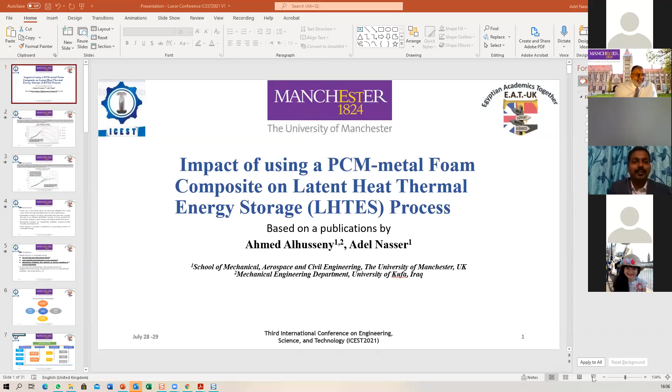He's from the Department of Mechanical, Aerospace, Civil Engineering, Faculty of Science and Engineering, University of Manchester, UK. He's ready to share his experience and impact of using PCM metal foam composites on latent heat thermal energy storage process. A small gist about him: mechanical engineering graduate from the Faculty of Engineering, University of El Fatih, Libya, followed by an MSc in computational methods and fluid mechanics from the Aeronautical and Mechanical Engineering Department, University of Salford. Then he joined the Thermo and Fluid Divisions of Mechanical Engineering Department at UMIST as a researcher, then went back to Salford University for 5 years to work on a number of projects. He has done so many research projects, flourishing for more than 19 years. University of Manchester has the privilege to have him in this position. With that small intro, I would like to invite our speaker to share his experience with the audience.

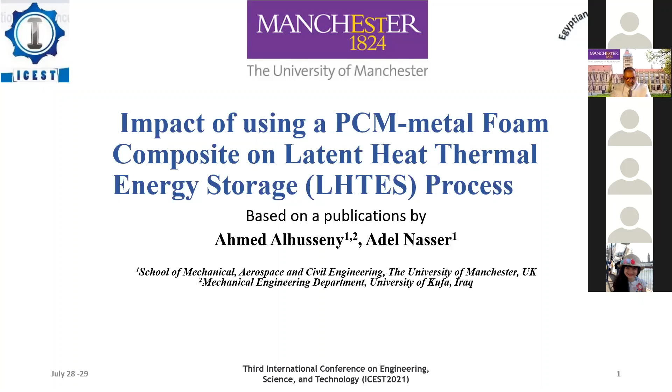What we're going to talk about today is the use of green energy, moving from fossil fuel to green energy, and the problems that we have with the use of green energy. Recently, PCM, phase changing material, became one of the topics that many people use to enhance the effectiveness of green energy.

The reason for this is this picture, which is a very old picture, but it depicts how much carbon dioxide will be generated for different increases in temperature around us. This is what we're talking about, the greenhouse gas and its impact on our life and our world. Many of us can see these days floods and rains, all these things.

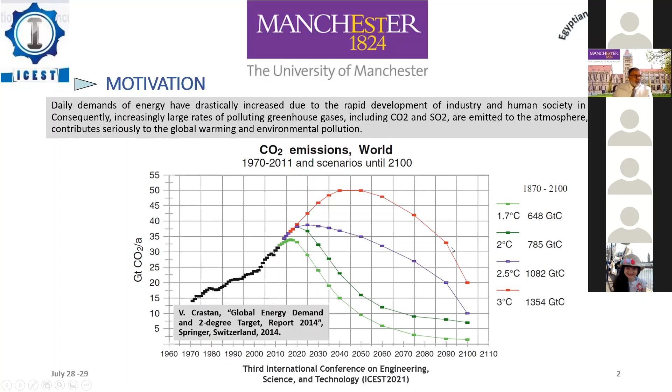From here is the current situation, and these are the various predictions of how bad it's going to go in terms of the amount of carbon dioxide that will be produced if we don't do something about it.

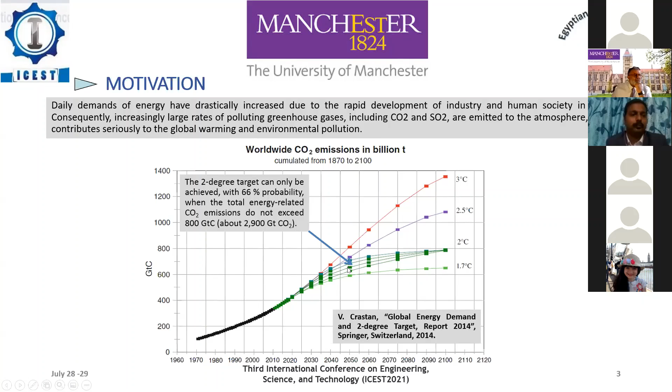The other part of this, everybody knows that the nations of the world came together and decided carbon dioxide should not push temperatures above 2 degrees centigrade, to save our world. So this is the range we are targeting, and we're going to do this by reducing our carbon dioxide. This is why we are moving from fossil fuel energy to renewable energy.

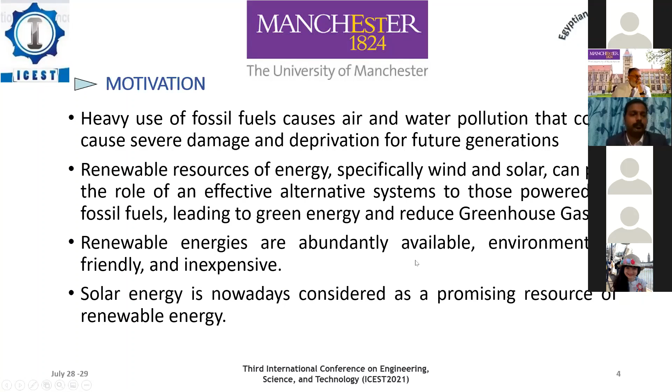One of the good things about renewable energy is that it's available and free, and environmentally friendly as well. Most people these days use wind energy, like Sharwan has done in his presentation, and solar energy is another popular renewable energy.

But the problem with them is that the temperature during the day is varying, and during the night there is no sun at all, so there is no energy we can use. It is intermittent as well as variable. But the need for electricity is not going up and down, it is always increasing. So the discrepancy between the amount of energy supplied and the energy demand is imbalanced.

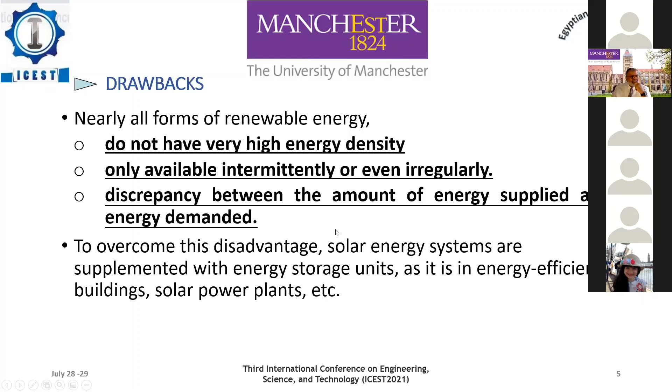This is where many people see storing the spare energy, when we have a lot of it, as a good way forward, so we can use it when we need it. So, energy storage technology - this assembled picture is what we are focusing on. Obviously there are other ways, but energy storage at the moment can be mechanical, electrochemical, chemical, or thermal energy. We will be focusing on thermal energy.

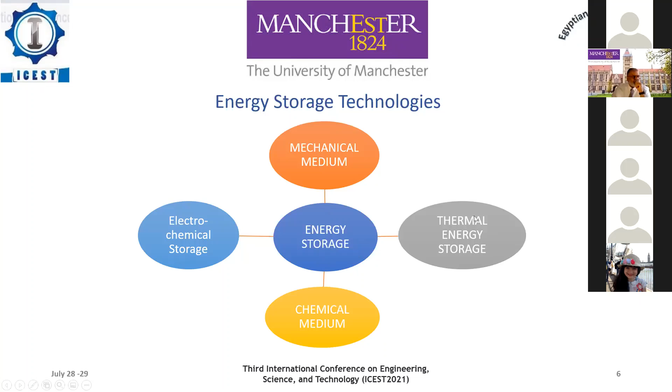Electrochemical is basically when we are talking about batteries, okay? Mechanical is when we are talking about the flywheel and the hydro energy, the pumped hydro energy.

In chemical energy, we're going to talk about a lot of chemical components that can be broken down into small components using heat, saved separately, then brought together when we need the energy. This is where most of our work in our group is in this area. We did some work on hydrogen, but this is the one we normally use, especially the latent heat. This technique is sensible heat storage, latent heat, or thermochemical.

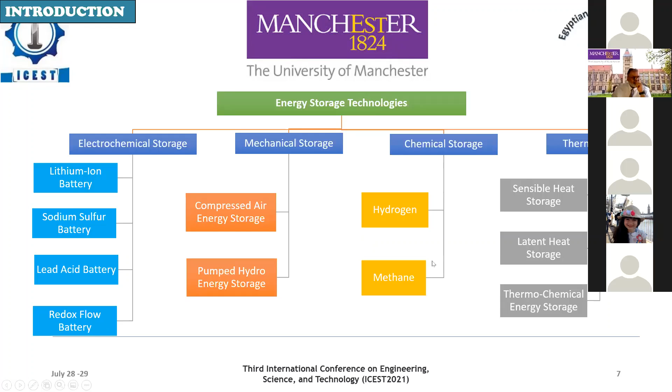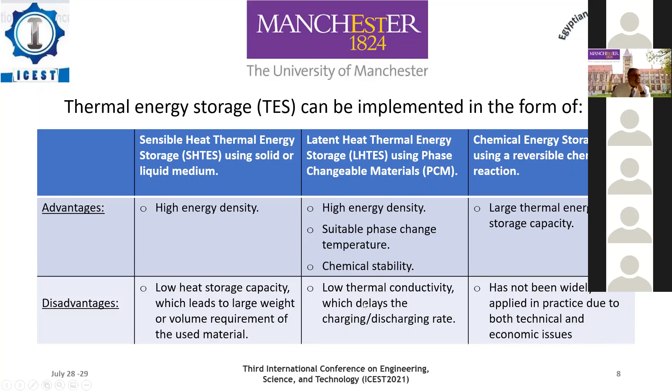And we'll cover this metal foam with paraffin, which is the phase changing material. This is something Dr. Ahmed and Rakim found out of the literature survey. Yes, Rakim Al-Sabar. Rakim, please mute your mic.

It is disturbing others, Rakim. Yes, Professor, please proceed, sorry.

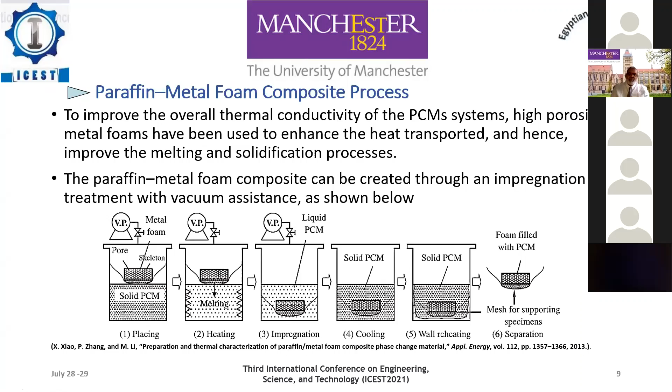Thank you, Dr. Adel. So here, if we have this sponge metal, we warm or heat this PCM material and it becomes like liquid down through the structure, the sponge or metal foam in it, and leave it there to cool. When you bring it up, the paraffin itself covers all the structure of the foam. This combination between PCM and metal foam is a kind of storing media that we're going to use to enhance our thermal energy storage.

So the foams, this is how they look. There are two examples here: a nickel one with different pore densities. Here we have 5 holes or pores per inch, here we have 10, here we have 25.

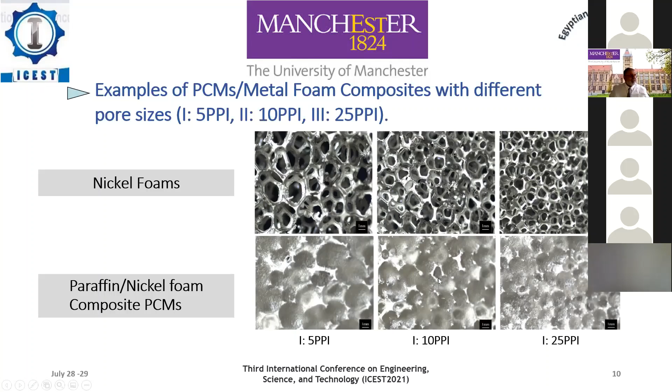So even with that, there is a variety of structures we can use, and each one will have a different capacity for heat. If we use this with the paraffin, this is a kind of PCM material we'll be able to use in practice. I have another example, which is copper, again with different sizes, and we cover it with paraffin.

Now we're going to use one of those to explain the advantage of what we just did, the advantage of mixing PCM material and metal foam. I think that was one of the very early papers that Dr. Ahmed produced. What was our test study or case study?

We have a tank, or rectangular container. Inside it, we filled it up with the PCM metal foam we just created. We cover this around it by a layer of metal foam, a different one, but that doesn't matter. Then we have a channel where the water goes in from this side, goes around here, and comes out from the other side. So this is basically the problem that we were trying to solve.

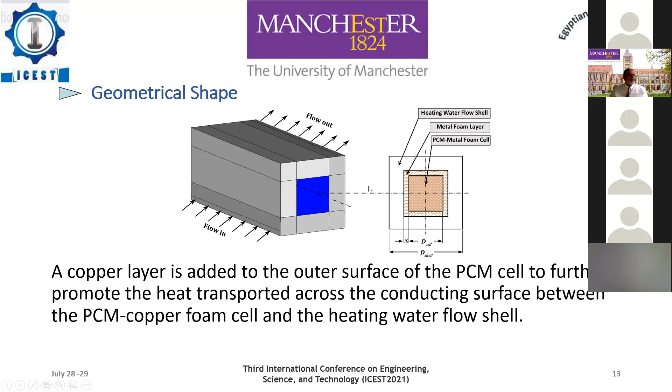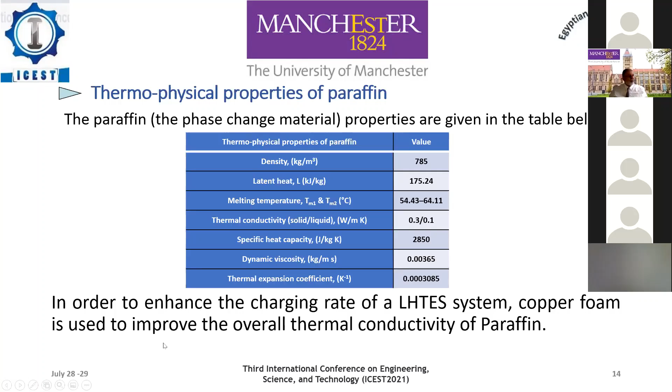These are the properties which come with the paraffin, okay? And in order to enhance the rate of charge of our system, copper foam is used to improve the thermal conductivity, as I just said. What's happening with the questions?

Don't show me up. Okay.

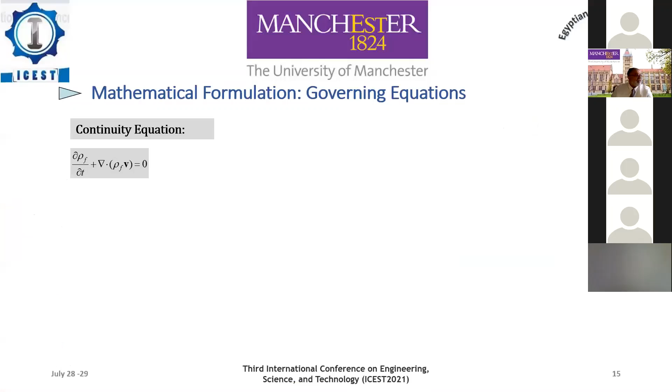I think the animation is not working in this, but it doesn't matter. I am going to explain. Anybody who is an engineer will know what a governing equation is.

As Dr. Sharwan just said, we have the continuity equation and the momentum equation. In this equation, we have a few new terms that appear which represent the inclusion of the phase changing material. There is phi here, which represents what we call porosity, and C and K, which is called inertia resistance. Those terms here are the viscous term, as you can see mu here, and this here we call the inertia term.

But those terms I just pointed out, those three terms, are not readily available, and we need to use some empirical formula to be able to calculate them. I will show you some of them. So this is the continuity equation, the momentum equation.

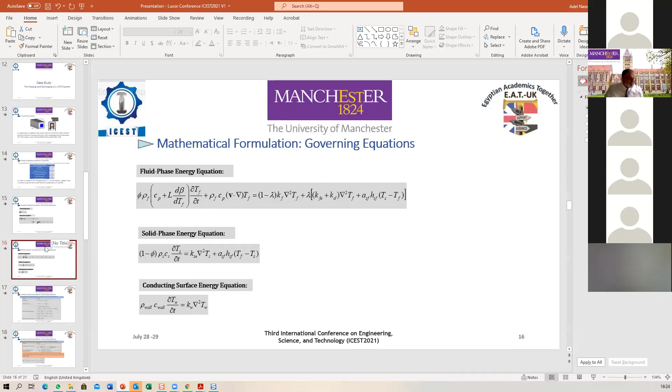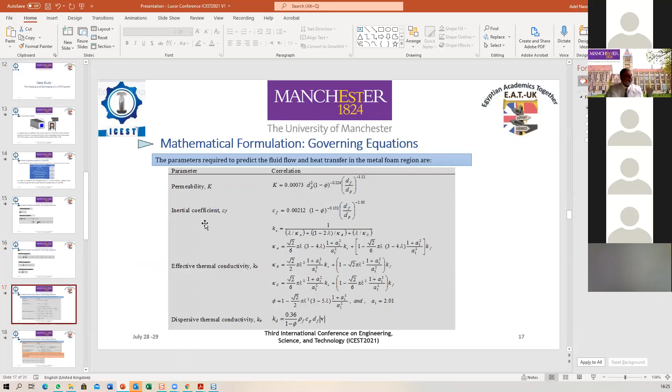So for us to solve those two systems, we need some empirical formulas. I'm not going to give you any headache by going through them, but this is the permeability, the inertial coefficient. And again, if we go here, we have the interfacial specific area. All those values we have actually included in the calculation. One new term to you is what we call liquid fraction or solid fraction, which is the amount of liquid in the combination. We'll talk about that in a few minutes.

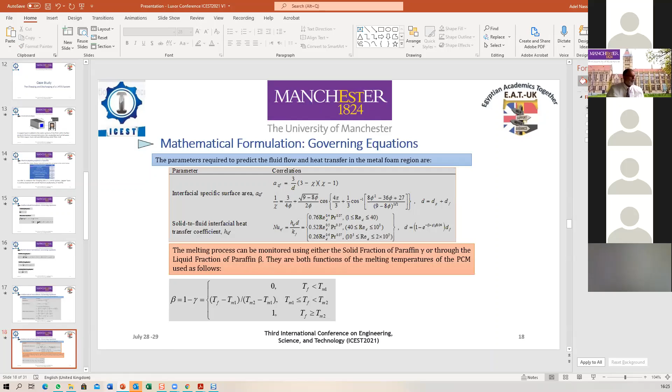So let me see now if it's going to work without a problem. Yes, so for the problem we described or showed you earlier on, we have this boundary condition. The mass flow in for the water is equal to the one coming out, and there is a temperature at the outlet using the zero gradient condition. This is sort of, at the wall, we have various terms which represent the heat and temperature going through the system.

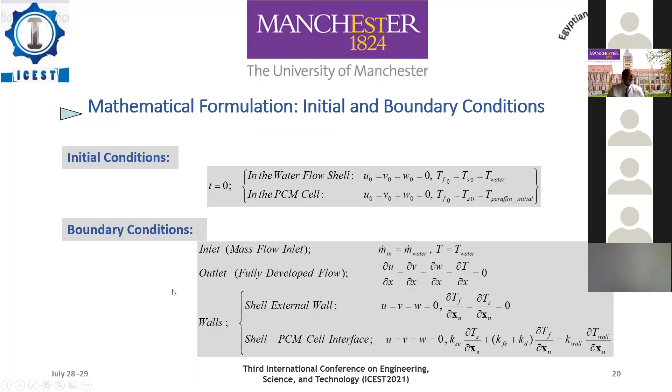Operating conditions here: we will give our results at a volumetric flow of 0.5 meter cube per hour, and the water temperature going in is 80 degrees, and the paraffin initial temperature is 16. We're going to have, you remember when we talked about the copper foam characteristic, you have the cell, and this cell of PCM is covered or surrounded by metal foam.

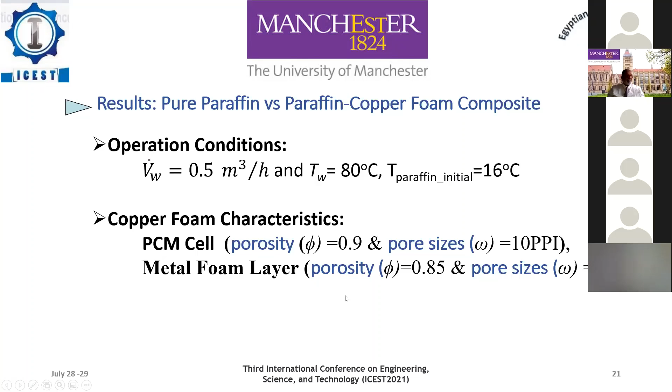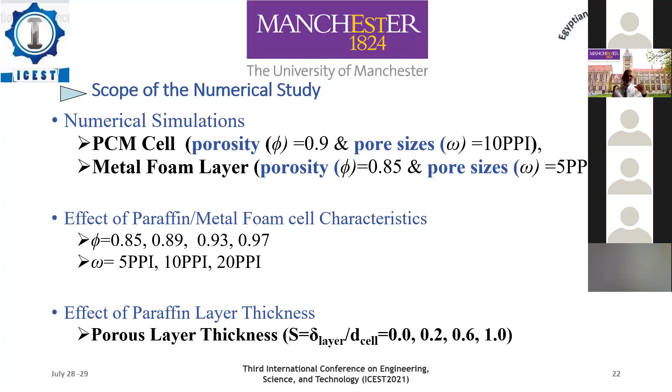These are the basic values that we used when we calculated our simulation initially. Then we did some specific calculations to have the effect of changing porosity and changing the pore size, which is how many pores per inch. Then after this we studied the thickness of the layer of paraffin we put on the structure as well. So this is where you relax, and I'm going to just keep ticking. This is the one with pure paraffin. This is the one with copper and paraffin.

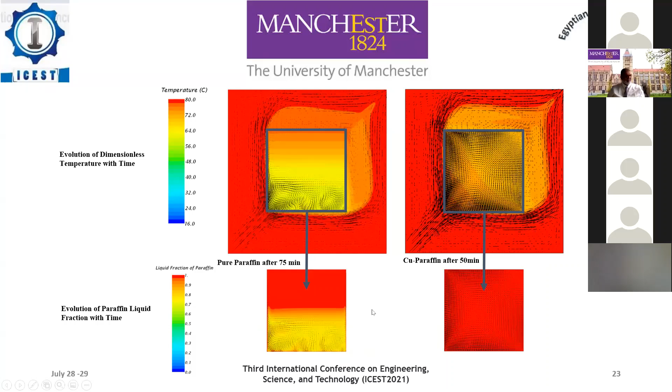So now we reach a stage when there is sufficient heat, 100% is being melted, while here it's still going on. I think it's going to go up to 90 minutes. This is the difference between paraffin on its own, which took 90 minutes to store energy, while when I'm using a composite storing material, a combination of copper and paraffin, I'm doing it faster.

This graph will explain what I'm saying in a more logical way. Theta here is a normalized temperature, so it goes from 1 to 0. Gamma is the solid fraction we talked about, how much solid is in the mixture. Here we're saying there is 0 solid in the mixture, here we're saying 1. So the dotted line is for the solid fraction, and the solid line is for the pure paraffin.

So if we look here, as the temperature goes, the solid reduces in value, the amount of solid in there, until you come to a point when your solid melts a little bit and becomes mushy. It keeps moving from a mushy state, more fluent, until it reaches a certain time when every bit of solid is converted to liquid.

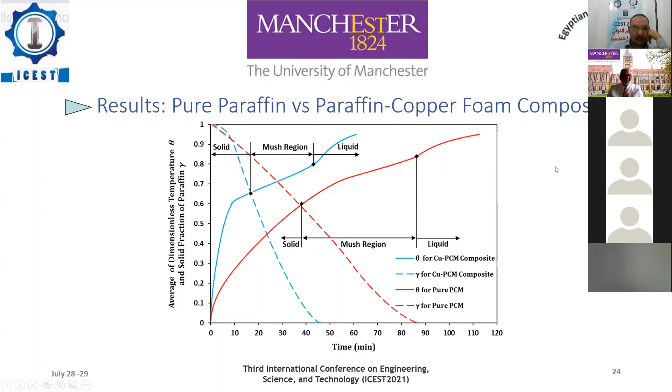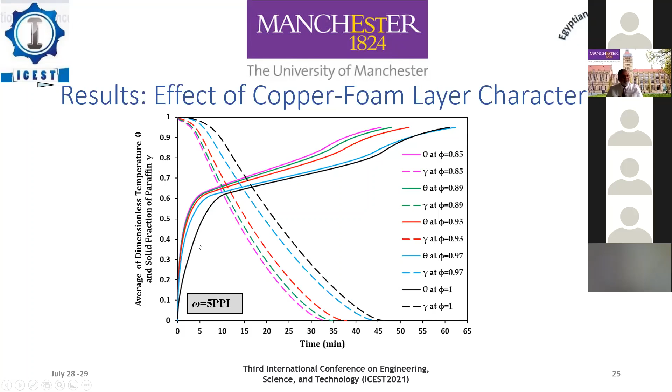Then we did some calculations for various porosity values, and you can see the bigger the porosity value, the more time is needed to melt. Our phi here is at 0.8, but phi at 0.9 is higher there. So the amount of solid that is converted to liquid at the value of 0.8 is less than at 0.9. We did this experiment for various pore sizes, 5, 10.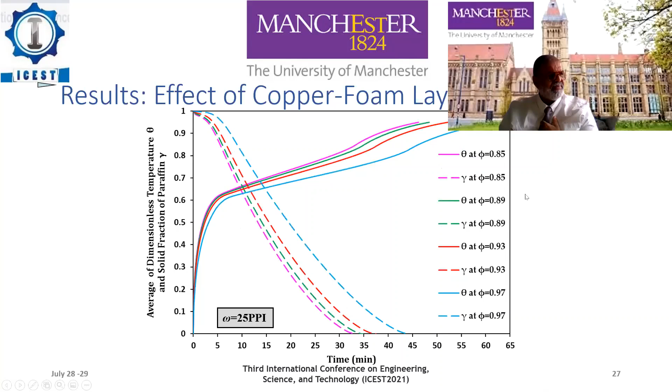Now I'm going to speed up. What we did as well is calculation to study the thickness on top of the metal, how much paraffin thickness we use. Again you can see it goes from 0 to 1, so again with time, the slope here is smaller, so it takes less time with a smaller system than a larger system.

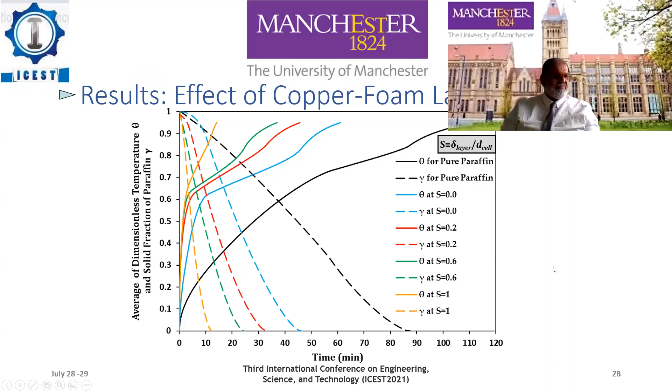And this is where I give my conclusion. Using a composite PCM with metal foam will improve the charging rate, nearly by 50% of the time. Adding a metal foam layer on the structure, making it thicker, increases the charging process. Reducing the porosity, as we saw from the picture, improves the charging rate achieved. And the pore size, which is how many holes per inch, again has no significance on the rate of change.

Okay, and this is where I finish.